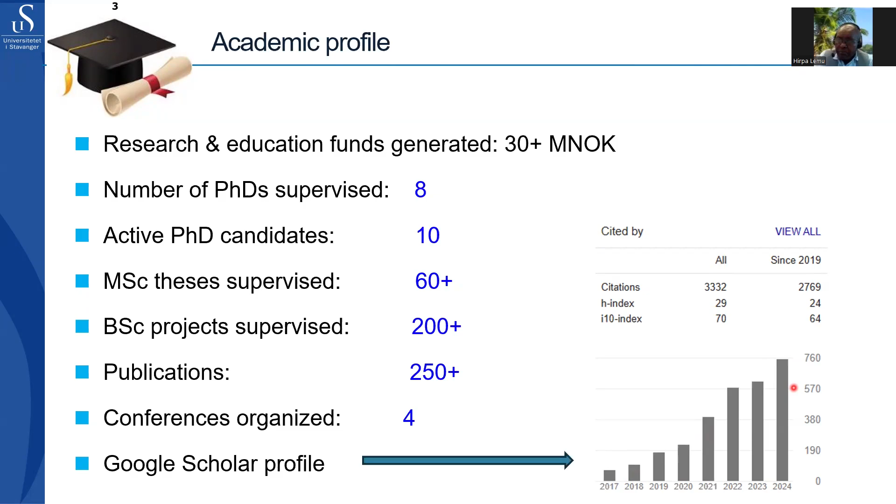My research area, as a mechanical engineer, is very wide and covers a lot of areas. But the current hot topic that we are working on is additive manufacturing and 3D printing technology.

There is research going on, both for master thesis and PhD thesis, on design for additive fabrication, topology optimization, additive manufacturing especially for healthcare applications, powder bed fusion based additive manufacturing of metal printing, and also wire arc additive manufacturing technology.

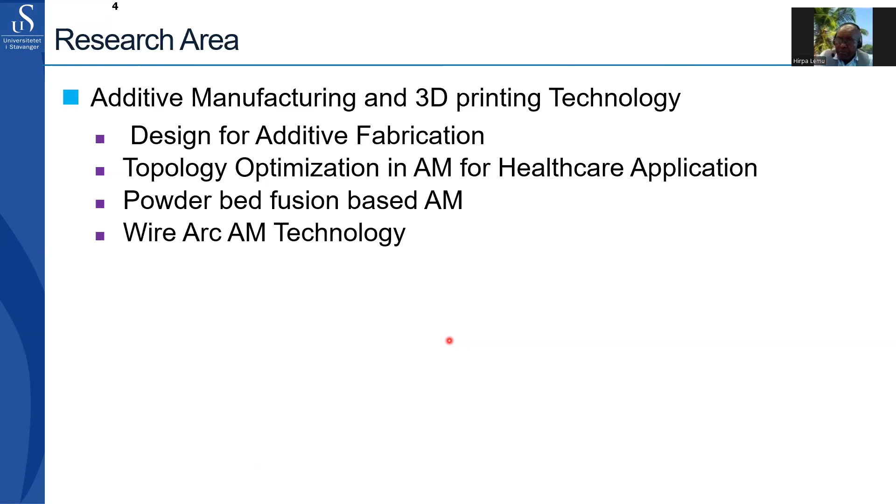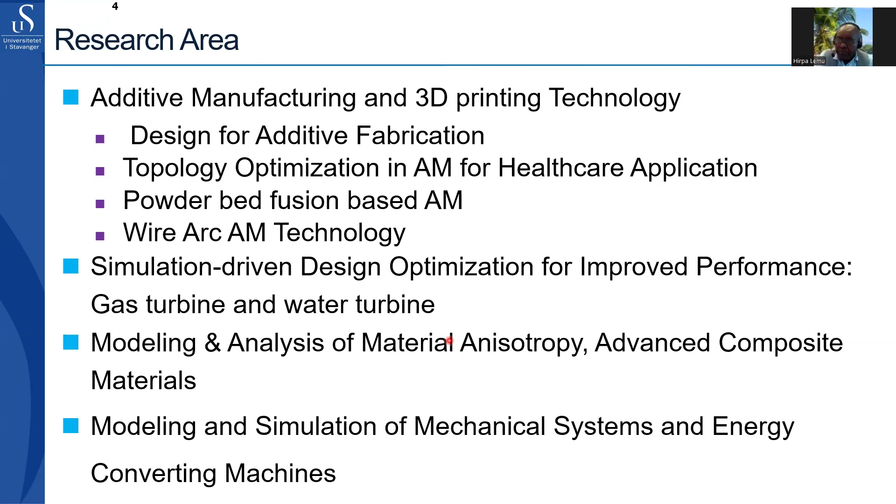For several years back, we have also been involved in simulation-driven design optimization for improved performance of energy converters, such as gas turbines and water turbines, modeling and analysis of material anisotropy, study of advanced composite materials, and also modeling and simulation of mechanical systems and energy converting machines, which are some of the research focus areas we have been involved with.

Because of that, the university's engineering focus is mainly in design and materials engineering. That represents the core part of our research. At the same time, collaborating with the oil industry in the region is also one input for our research activities.

The university has more than 12,000 students, among which over 1,000 are international students. There are also 1,900 employees. The teaching and research activities are divided into 34 bachelor programs, 43 master programs, and 8 PhD programs. Structurally, the university is divided into 6 faculties.

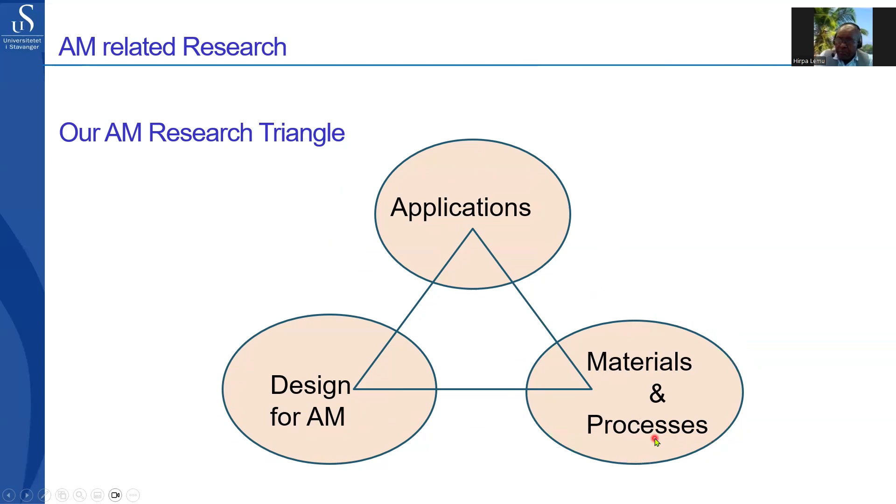So I will not go particularly into the applications and the design for additive manufacturing, but I will focus on materials and processes related to additive manufacturing research.

Let us begin from the beginning. Even though additive fabrication in different forms existed for many years, the modern era of additive manufacturing, or 3D printing, started in the mid-1980s. The person often mentioned as the father of this technology is Charles Hull, who invented the stereolithography apparatus technology in 1984, managing to process or convert a 3D computerized model into a physical object. That was the intention.

In the academic area, there's always a question of whether Charles Hull's invention is really a new technology, because technologies can be modified, converted into another form, or combined, and so on.

Charles Hull combined existing technologies to create a new one. There are three main existing technologies combined in the solution of the stereolithography apparatus, or SLA.

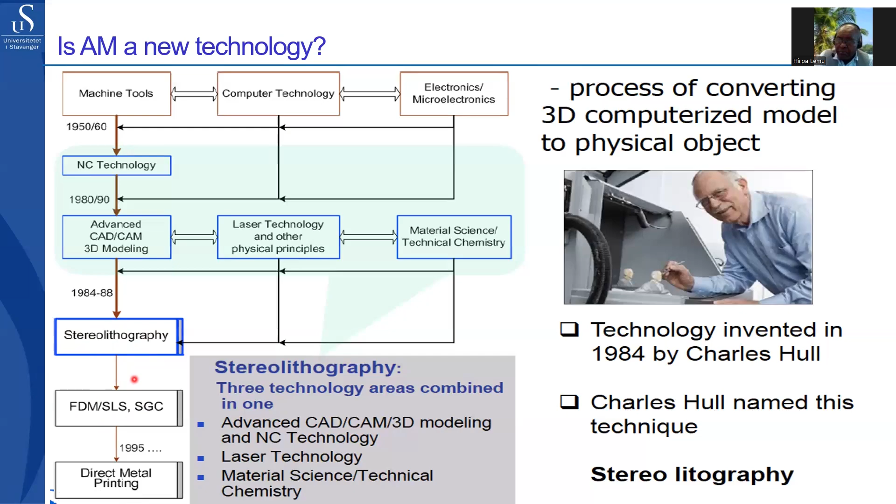Before going further, it might be good to distinguish between additive manufacturing and the conventional manufacturing process. It is positioned as a manufacturing process for green transformation.

If I make a short comparison between the conventional and additive processes: in the conventional process, for example, if I want to produce a part that looks like this, I have to start from the top, then remove the first piece or chip and go down, based on the achievable depth of cut, until I remove this material, and this removed material becomes a chip.

In the case of additive manufacturing, on the contrary, the process starts from the bottom, and materials are deposited layer by layer until the final layer is achieved. In that process, there is no, or very minor, waste that goes to chip.

For example, in this case, to get this object we start from an input material that looks like this, then remove material to get the shape, and the removed material is the chip. Then we have this waste here.

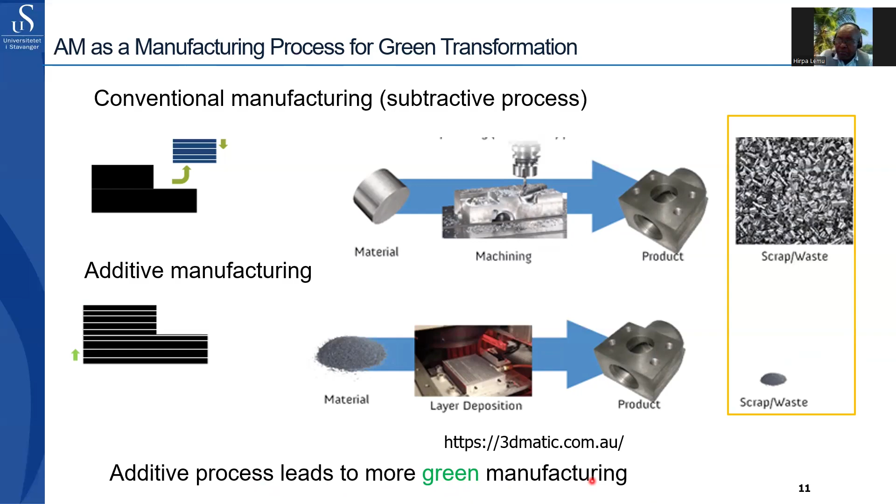That is the reason we can advocate that additive manufacturing leads to a more green manufacturing process, and it is a technology that contributes to the green transformation.

There are different engineering materials, and some of them are polymers, one of them, metals, composites, ceramics, and biological materials are also nowadays appearing as engineering materials.

The American Society for Testing and Materials, ASTM, has already standardized seven major material processing categories. That means we can process materials by binder jetting, direct energy deposition, material jetting, material extrusion, powder bed fusion, polymerization, and sheet lamination. The material processing for additive manufacturing purposes can be one of these standardized processes.

As indicated here, a study back in 2016 in the UK shows the landscape of this technology and the maturity level of these materials. It places the materials and indicates that polymers are the most commercially available materials for additive manufacturing.

They were only not yet developed for direct energy deposition at that time, and sheet lamination. Metals and composites were at a similar maturity level at that time, but there were also some works in the research and development phase for metals, such as metal jetting possibilities, metal extrusions, and sheet laminations. So metals are also promising materials with sufficient maturity for additive manufacturing.

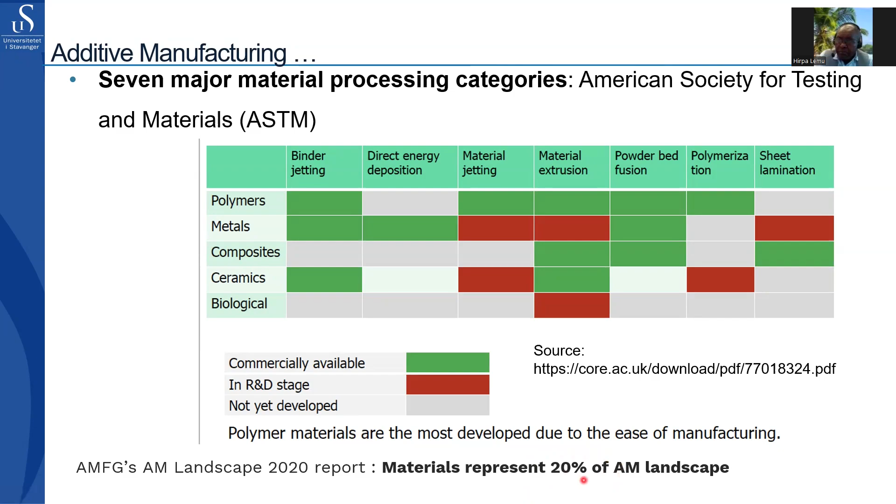The composites, ceramics, and biological materials were at a different level of maturity at that time, but the situation can be different now. In general, polymer materials are the most developed due to the ease of manufacturing or processing. A 2020 report from AMFG about the AM landscape indicates that materials represent 20% of the AM landscape, which indicates the influence of materials in terms of sustainability and green transformation. That is a significant contribution in the process.

As I mentioned already, the objective of Charles Hull when he developed the stereolithography apparatus was how to use this technology for rapid prototyping. Then different technologies appeared in the market, and the idea of transforming from prototyping to fabrication of functional parts emerged due to the maturity of the technology.

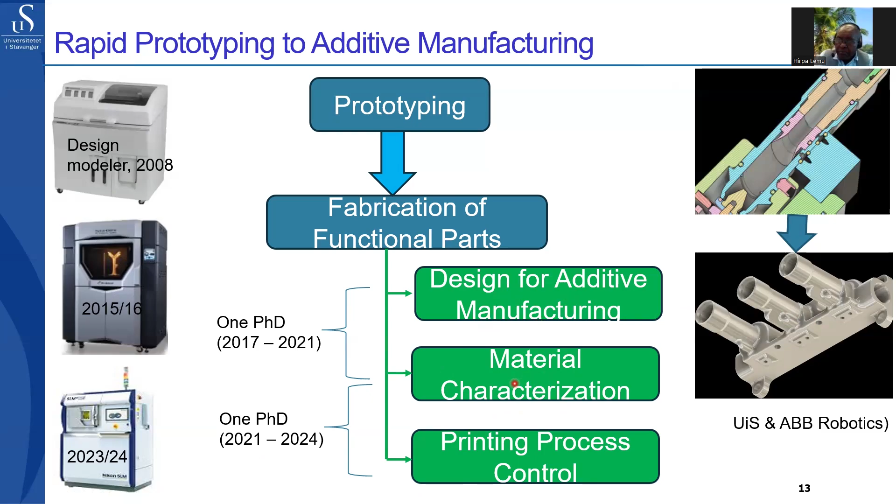Apart from common engineering materials or engineering products, this technology has shown significant impact in other areas such as medicine. Long back we understood that there are different images generated in medicine where doctors take CT scans, MRI images, and so on, and the interest to use this technology in medicine has also developed.

We know already, if we have a 3D CAD model of our organ or any part, then there is sufficiently developed technology to build it layer by layer. The challenge is now, how can we convert this medical image data to an understandable format that the 3D printer can understand? That we identified as one of the challenges - to transform from medical image data to a 3D CAD model, a mechanical drawing type of data.

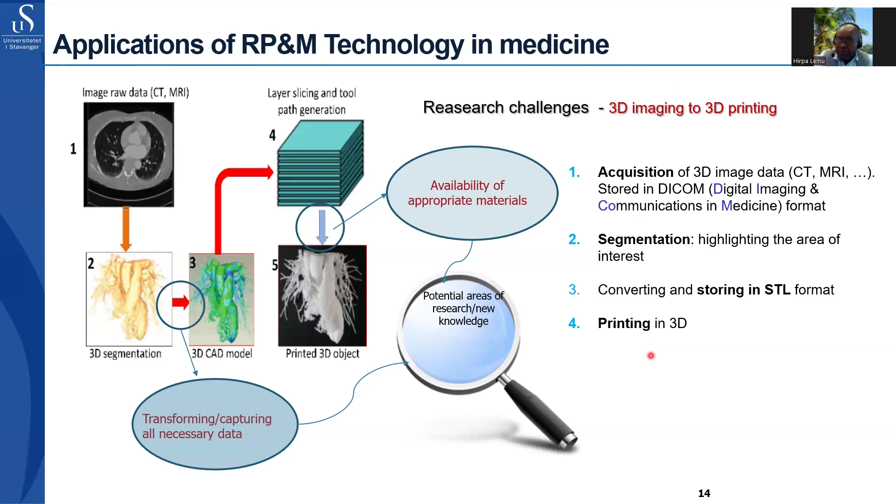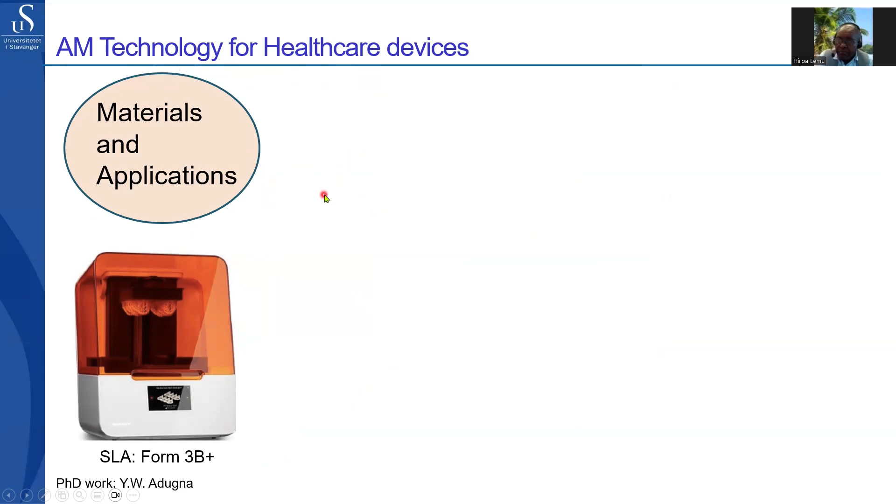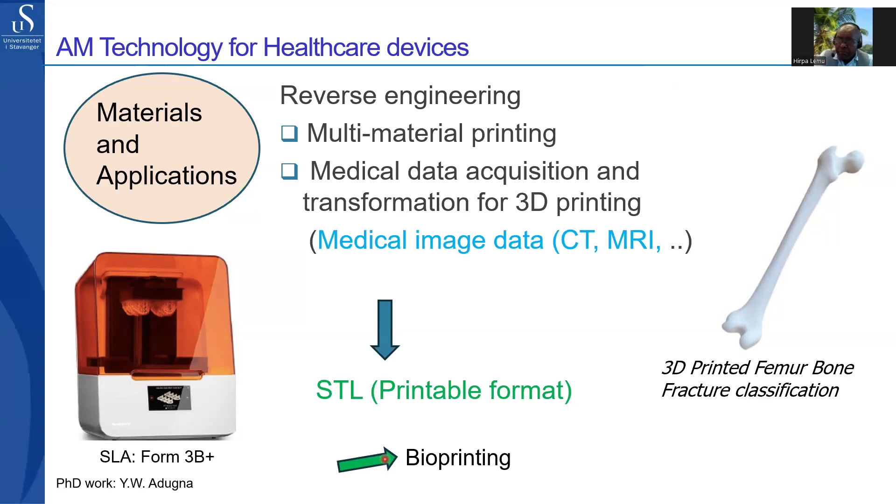One research that we are currently working on is for healthcare devices, which involves materials and applications, particularly reverse engineering of engineered or natural parts, and also involving multi-material printing to combine different materials. In this research we collaborate with hospitals, especially with orthopedic doctors. By receiving medical image data, then converting that to a printable part, we can print by selecting materials that are suitable or compatible for that purpose. That has also led us to the concept of bioprinting for our future research.

Another research that we have ongoing is 3D printing of polymers on functional textiles. That is also one interesting topic that we are working on, because such materials, which have complex geometry, require us to use the design freedom that this technology provides. One of the works is, of course, to produce filaments by combining with already existing polymer materials.

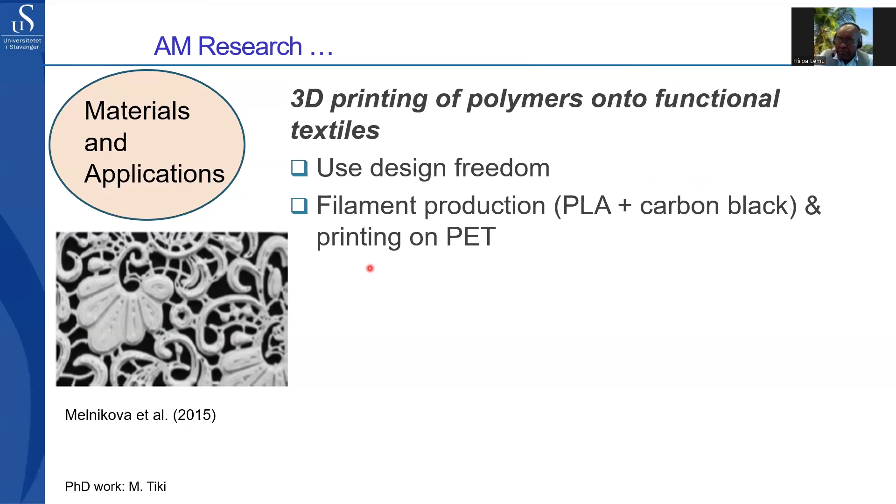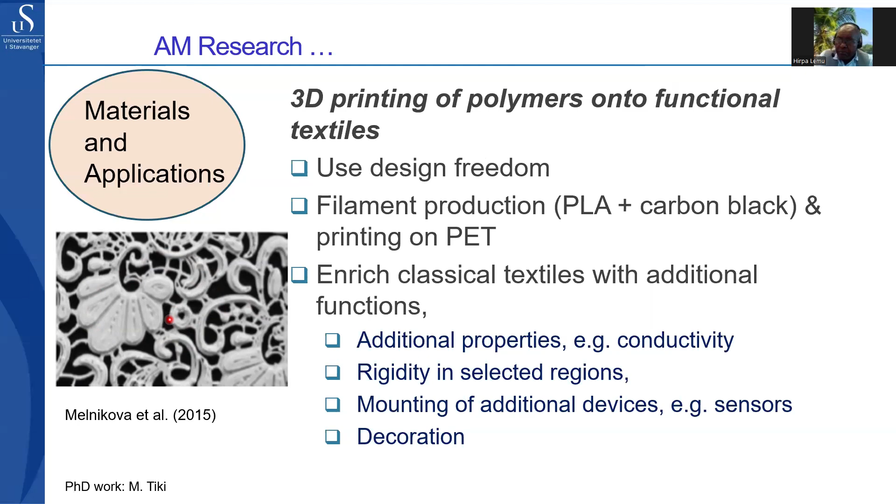Then we can combine other materials in order to achieve the required properties, and also to make additional properties such as conductivity, rigidity in selected regions, or mounting of additional devices such as sensors and decorations, and studying the properties. For example, if it is a textile, then washability, to what extent there is a binding effect, and so on are the focuses in this research. Then optimizing the printing parameters accordingly.

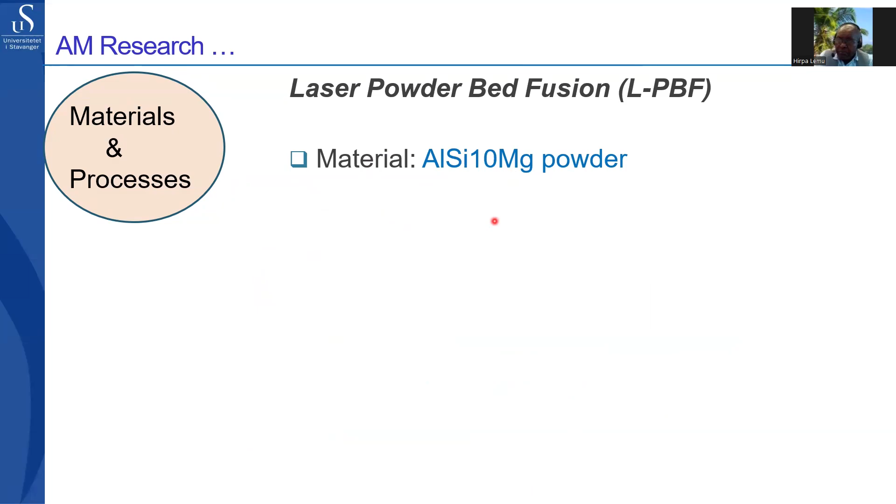And another research is on laser powder bed fusion technology. We selected aluminum powder, of course only because of availability for the existing 3D printing process. The work involves studying the influence of process parameters, such as printing strategies and building orientation, in order to study the performance, and also developing property prediction models using machine learning methods.

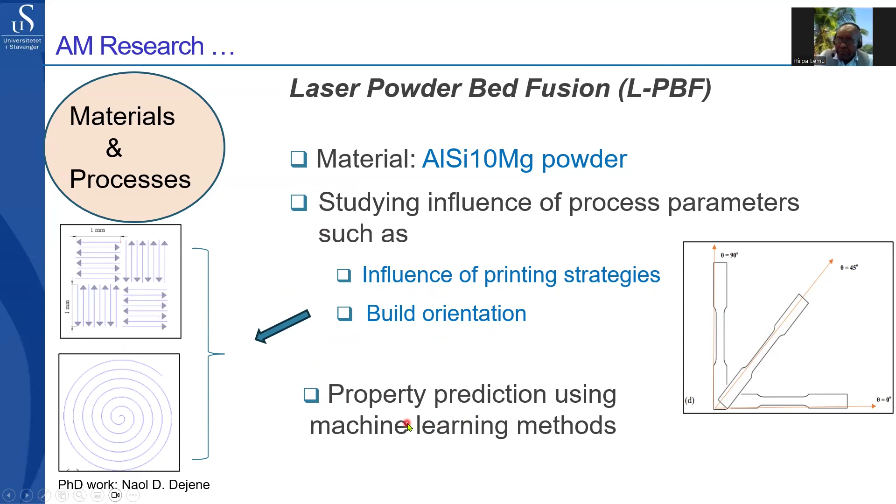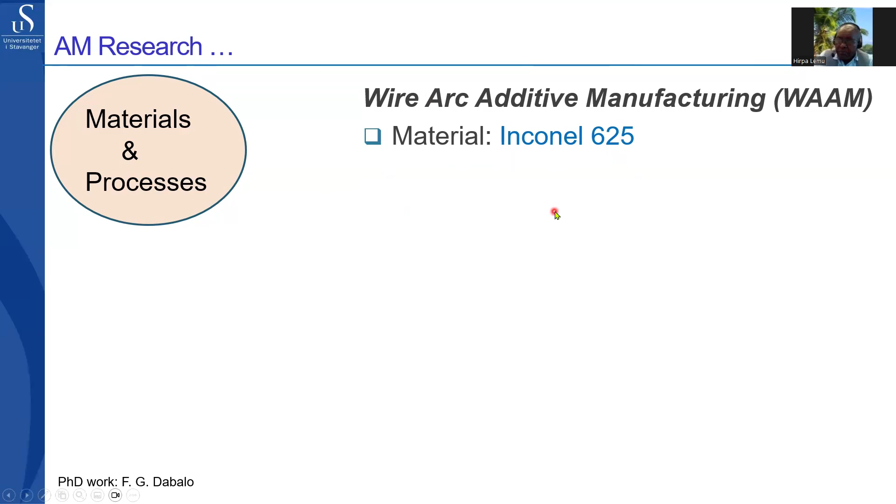And the other technology or research that we are conducting is additive manufacturing that is a form of welding process. The research is done on Inconel 625 material. The study focuses on process optimization to reduce defects, because, as I said, it is a sort of welding process, so there are many defects such as porosities, roughness issues, and also residual stresses and so on.

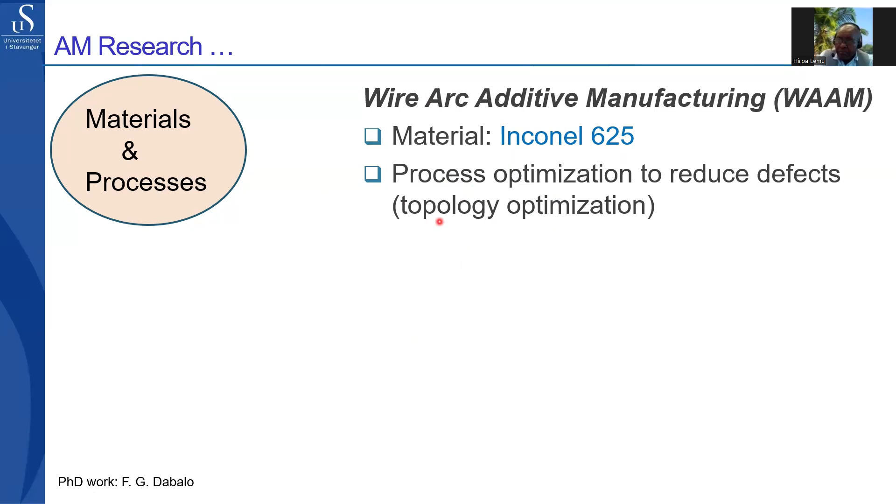And then we wanted to study the influence of the process parameters, how the parameters influence, and which parameters influence, in particular, residual stresses, strengths, hardnesses, and so on. And then also developing a thermomechanical model to predict the behavior for other parameters as well, so that it can be easily simulated and predicted.

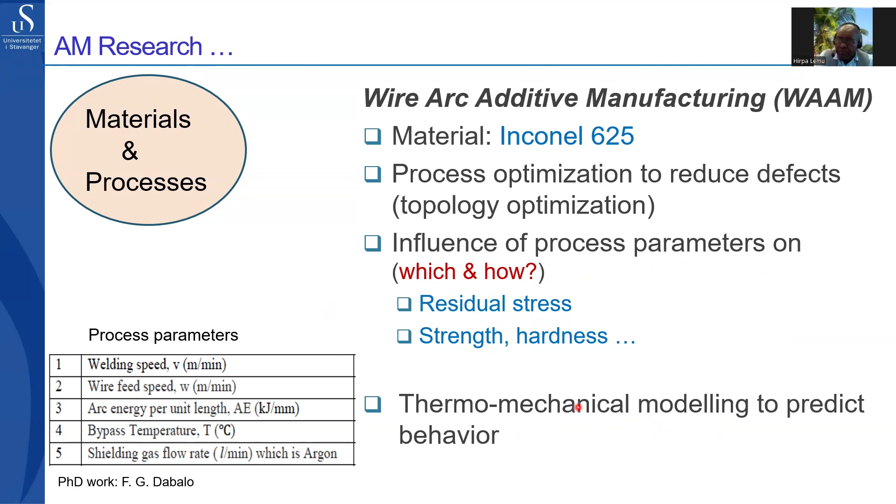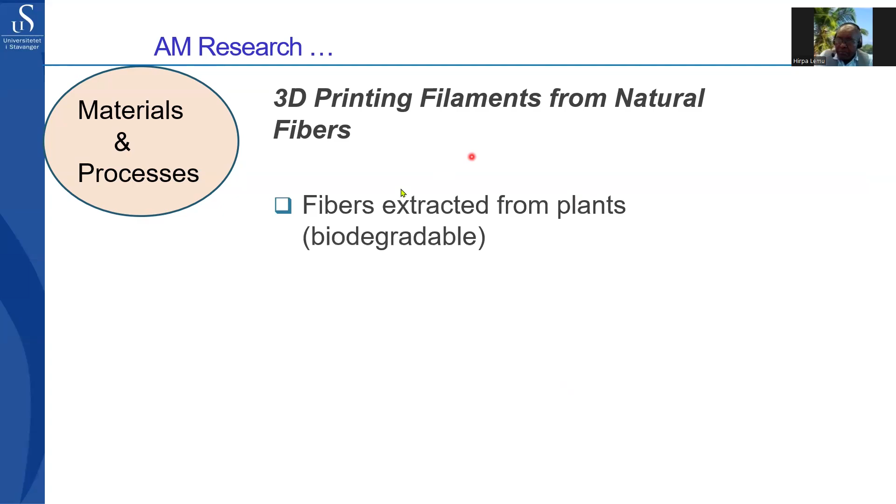Another interesting part of the research is that this technology provides us flexibility, so that we can use locally available resources. In our research, we work on producing filaments from natural fibers, and this research is being conducted in Ethiopia, by extracting natural fibers from different plants. For the moment, we are limited to enset, or false banana plant, and what is called sisal plant.

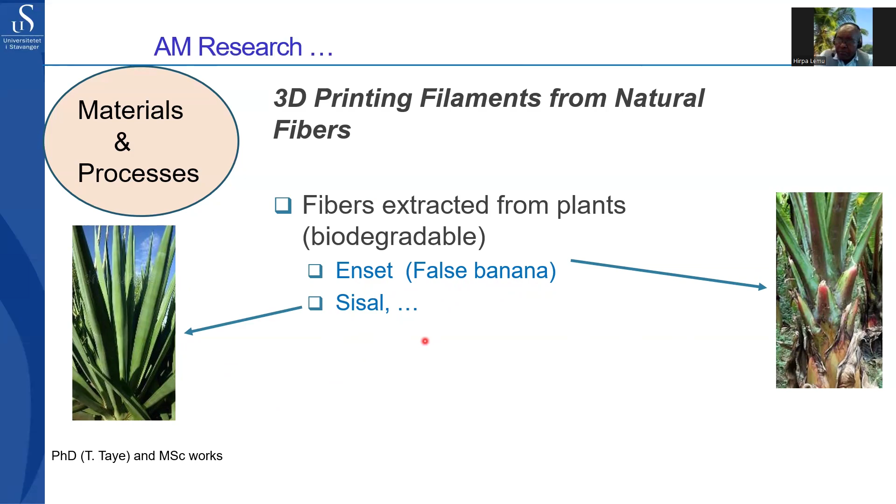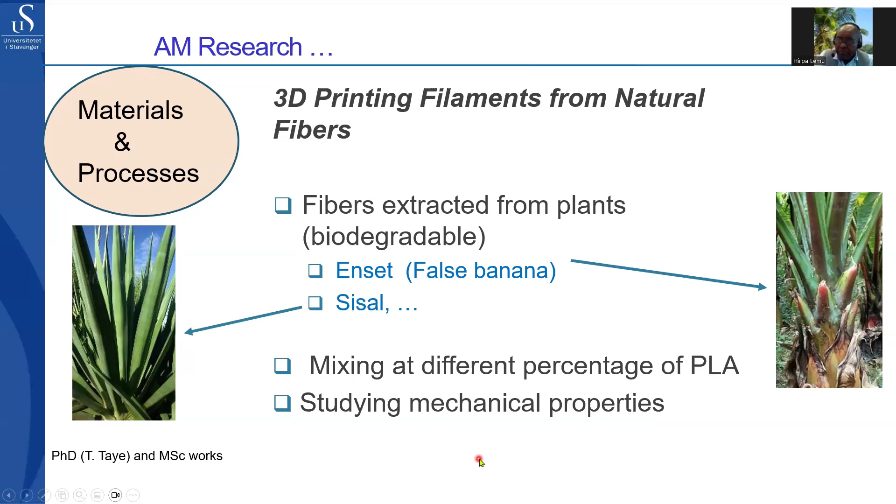The reason is that locally, traditionally, the fibers from these plants are used by farmers for different purposes. Then why not use them as filament in 3D printing? One reason is these plants are abundantly available, and secondly, they are biodegradable. If we combine them with existing polymer materials, we can reduce the impact of polymer materials on nature and the sustainability of the environment, and reduce the damage polymer materials bring in the manufacturing industry. And then we conduct a study of the mechanical properties after printing with the produced filaments.

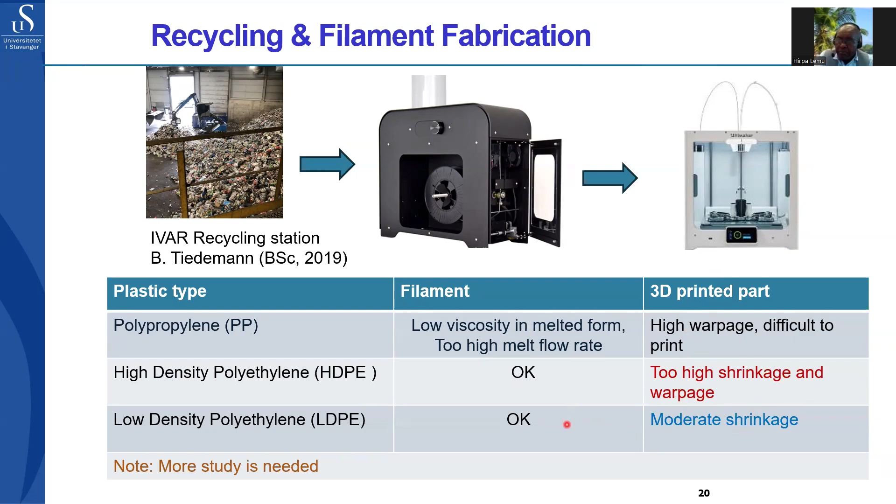And the other part is recycling of filaments from waste materials. We had some collaboration with a recycling station here. By producing filaments, we also study the filament properties for the different types of plastic materials, then print them, and study the behavior of the printed parts, whether they are difficult to print, the shrinkage effect, and so on. We have conducted some research, but it is something that we will continue with.

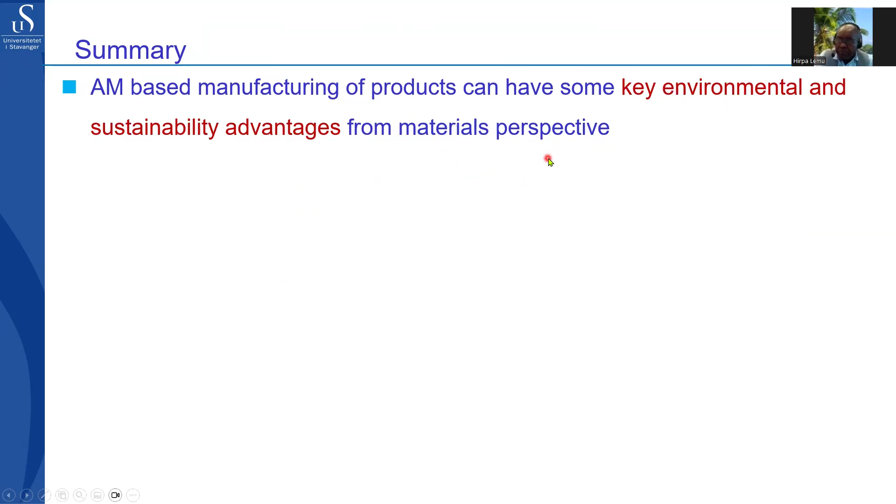Then to summarize this talk, AM-based manufacturing of products can have some key environmental and sustainability advantages from the materials perspective. At least we can mention three key advantages. One is reduced raw material requirements, meaning less need for mining and refining basic materials. As already illustrated, we can use locally available natural materials and combine them with polymers, so we can reduce the impact of the existing material types that we used to use.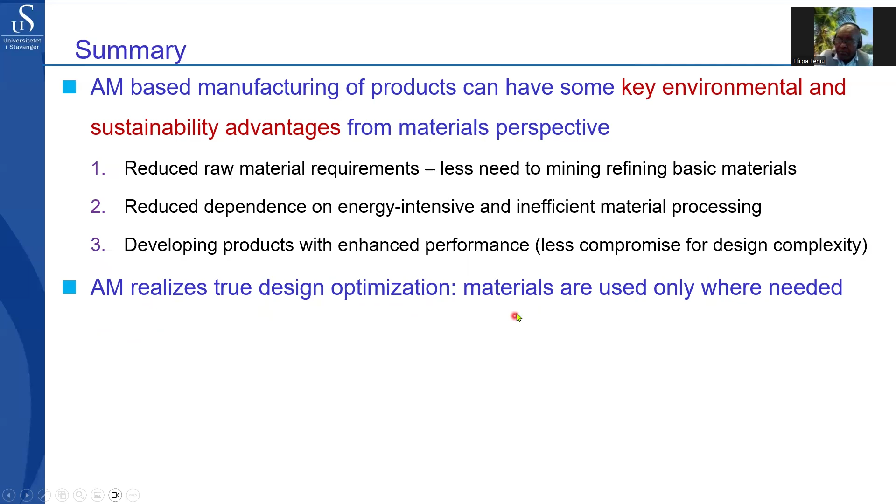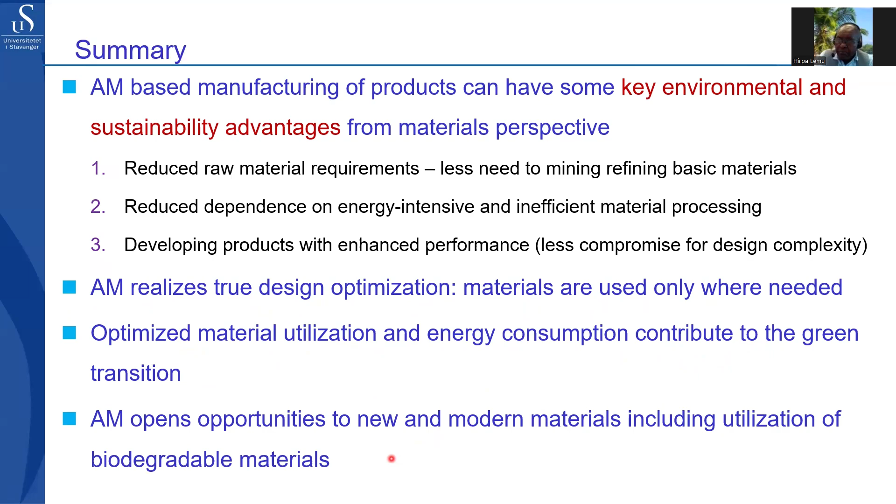The second one is reduced dependence on energy intensive and inefficient material processing, such as casting. And the third one is developing products with enhanced performance, meaning less compromise on design complexity, so we can produce very complex geometry without any compromise. AM realizes true design optimization, meaning materials are used only where needed, and optimized material utilization and energy consumption contribute to the green transition that is sought. And AM also opens opportunities to new and modern materials, including biodegradable materials.